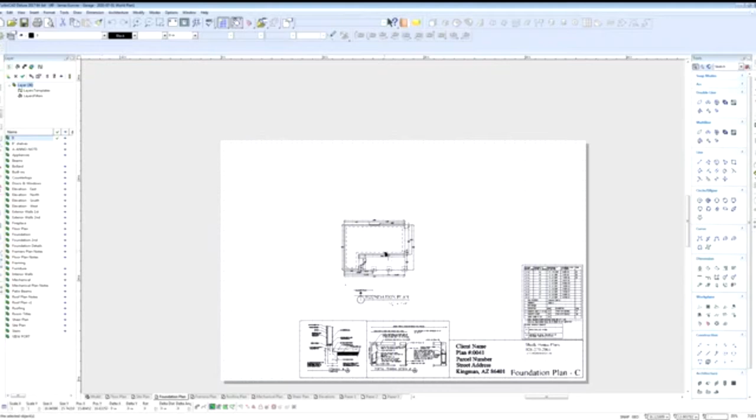Now what I'm going to do here too is make this a bigger scale so it takes up more of the paper. I'm going to right click on this. This is called a viewport right here. This takes an image, like a picture from our model space, and puts it into our paper space. So this is basically a picture of the model. We're going to right click on it and tell it to scale it differently. You can go to viewport and then fixed, and I believe the scale I want is 1 to 24, which I think is half inch equals a foot.

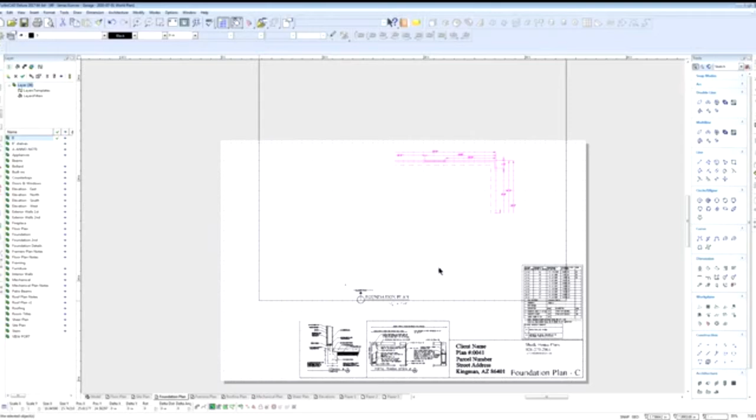All right, so I'm going to put this over there. I'm going to see if I can get this thing big enough. What happened there? Okay, there we go. Center it in here a little bit. Okay, good. So what I'll do then is later come back and change this label. And I got these extra lines in there, I got to figure out what that's about. And I got this in here—what's this? What are these things?

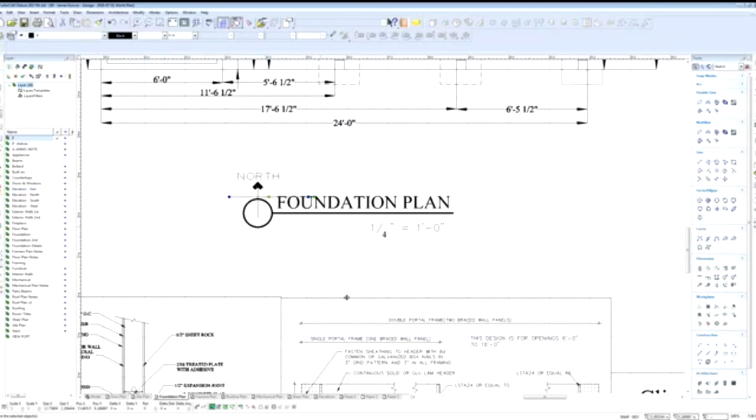It says east elevation. I'm going to get rid of those. Those lines are strangely on the paper space, which is not normal. Normally I just have viewports like this—this is another viewport, and this is another viewport. They're just pictures of the model space, so I can't really edit them inside here. I've got to go back to the model space.

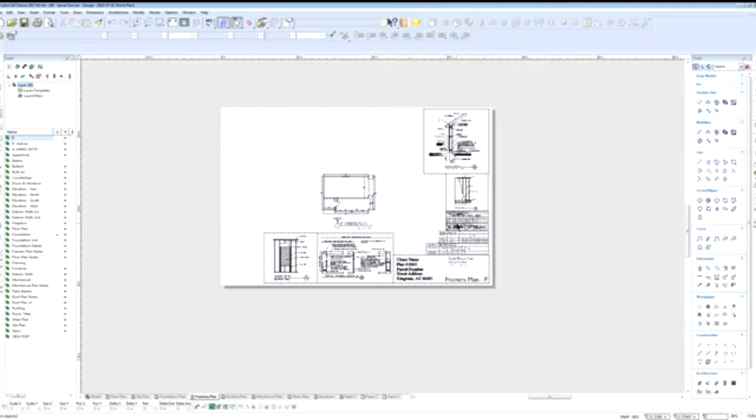All right, so that's what the foundation plan looks like. We're going to go here and change the framing plan. So let's see what it looks like so far. Okay, so these are details from another project, we left them there, and these are notes from a different project that we're going to need to change. Wall schedule is probably fine, but we'll have to adjust that. The beam schedule, we'll have to adjust that too. And then here is the framing schedule.

Notice it shows the beam on there. We're going to do the same thing with this one, make it bigger. Right click on it, go to viewport, go to properties, viewport—and now I actually created myself a little cheat sheet so I can remember the scales, that a half inch equals 1 to 24, but it took me a while, I still don't have it all memorized, so create yourself some notes. Make your life easier.

Slide this up there, make it bigger. There we go. Bring it up a little more. Make it bigger. All right, now we're smoking.

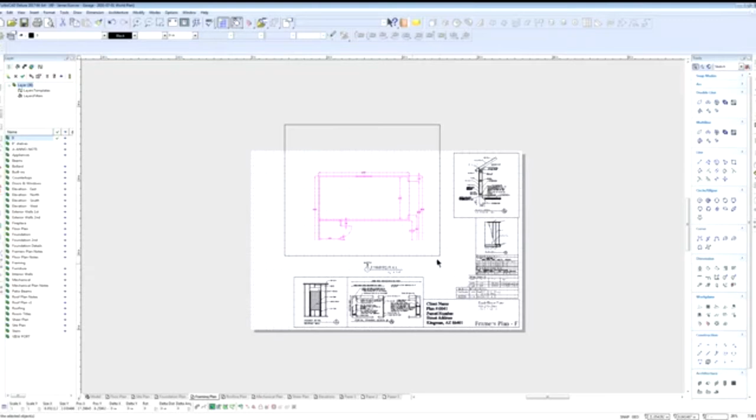Okay, so this is pretty much done. I'm just going to go back and make sure I got all the right dimensions that I need. And I also need to get the concrete back in here, so that's actually part of the viewport—the viewport tells me what layers I see, and right now I'm not seeing that layer. So then if I add the foundation layer, I'm going to get all the dotted lines and stuff, and I don't really want that.

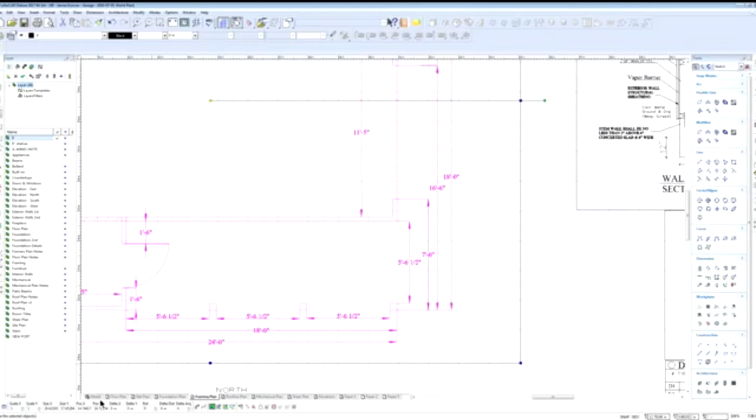So what I'm going to need to do is create some lines here just for the framing plan. I'm probably going to label them exterior walls, on the exterior walls layer, so they show up with the walls. Okay, so let's go back to the model space and do some editing. I want to hide the foundation because I don't want to see any of that stuff. And the foundation second is the second story, so I don't want to see that either. So I'm going to hide those two things.

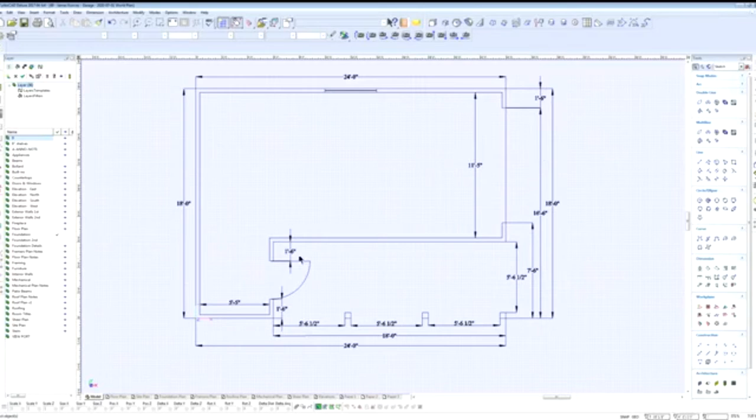Now I'm going to bring up this framing again because that was my measurements that I had before. Now, when it comes to the framing, I want to put in the center of doorways, so I'm going to add some measurements in here to get the centers. And then, like I said, I need to draw in these lines here. So let's grab my line tool. I'm going to make sure I got exterior walls selected, and I'm going to right click on it to make sure it's a solid line, so I could quick drop some lines in here for the edge of this patio.

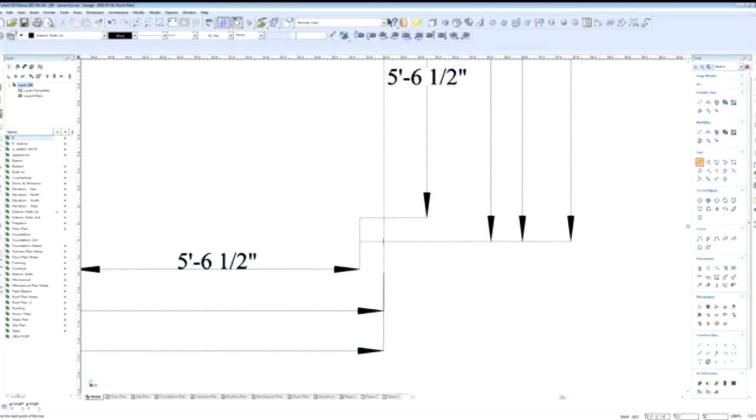Now I'm going to get my dimension tool and make sure I'm in the framing layer instead of the foundation layer. I'm going to come in from the edge to the center of this door, to the wall, to the center here. You use the M key to get to the middle.

Now I've got kind of a problem here. No, that's not really a problem. I'll bring it out here, and then I'll take the 1 foot 6 inch one and bring it in closer, because you don't want these to cross like that. It makes it awkward for the person reading the plans. So there we go.

If the guys need to know where the edges are a little different, they can look at the foundation plan. But these are the framers, so they don't tend to need that information as much. They often want to know where the centers are.

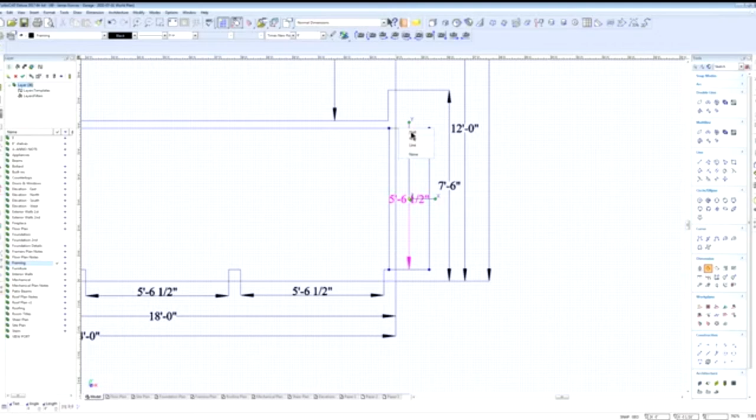Alright, so let's see, I'm going to put in... I think I'll leave this, but I want to add another one. I'm going to bring that in closer, and add the one from the wall to the corner, because I really want them to know that, oh by the way, that's a 6 foot porch. Yep, just like that.

There we go. I'm going to bring this out a little bit, and this out a little bit, to make it look nice and easy to read. That's the whole point. You've got to make it easy for these framing guys, because they don't always have the best sight—they're dealing with dust, sun, and all kinds of stuff out there. We've got to do whatever we can to make things easier for them, and that will also help you get more jobs.

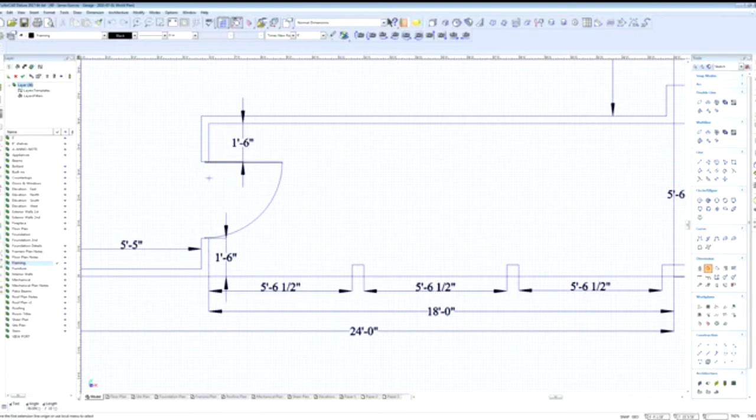Let's see if it'll work for here. M? No, it won't. Okay, so what we need to do is put a line across here to help us, kind of like a guideline, to get this measurement in. Let's go across the middle of there.

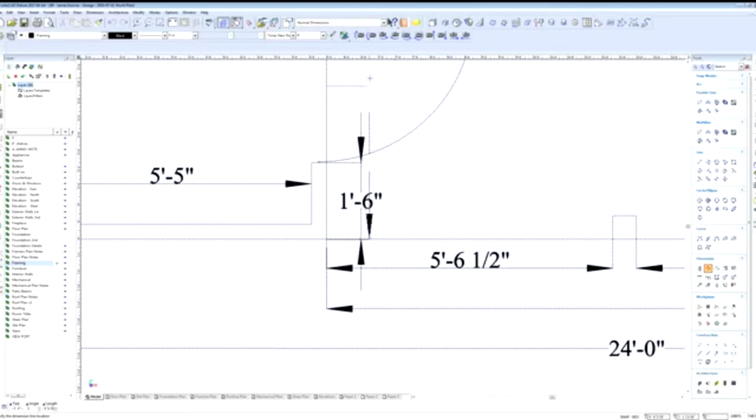Then I'm going to put in my measurement using the vertice button, V, select the wall, come in here, and click M for the middle. There we go. Now I can take my guideline out—zoom out, press space to get my select tool, grab that line and delete it. So now we know the center of the door is 3 feet from the edge.

Alright, let's see, I've got this distance, but I don't have that distance. Let's get that in there. There we go, there we go.

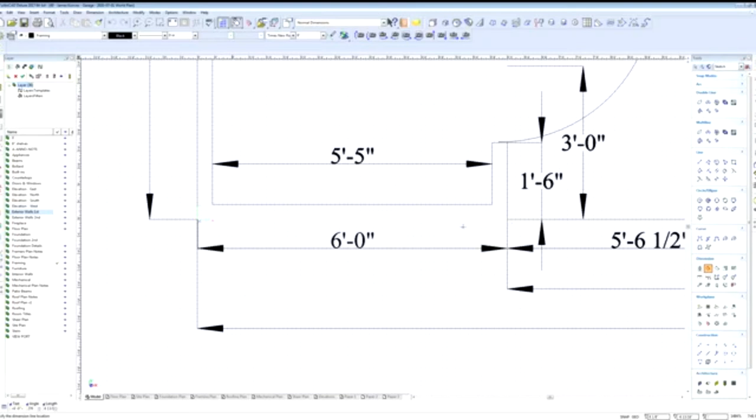Alright, now let's see, zoom out—that distance. Now I need to get to the center of this window, so I'm going to pull this out a little bit and get that going.

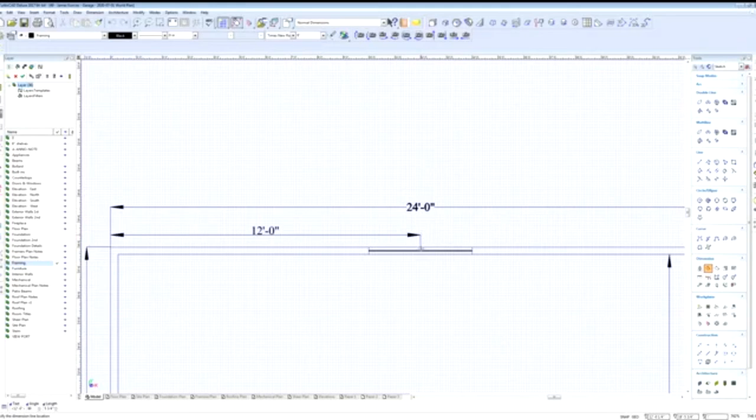Yeah, wall, and then I just use the M key again for the middle. It really does make this a lot faster, these hotkeys. I used to zoom in all the way and try to get as close as I could to these vertices, but I learned I could just press V, and bam, I'm in like Flynn.

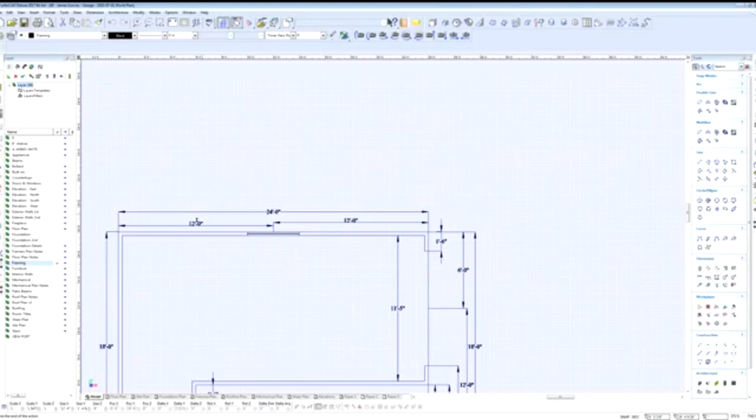Okay, it's coming up. I want to line these two up a little bit, so I'm going to cut the difference here, and bring this one out so they match. Notice you're just matching the tips of the arrows, and the numbers resize themselves to fit where they need to be. It's kind of weird how it stretches out like that, but you just have to ignore that part.

And we're going to take this, I'm going to bring it in where it needs to be. Right there. Okay, great.

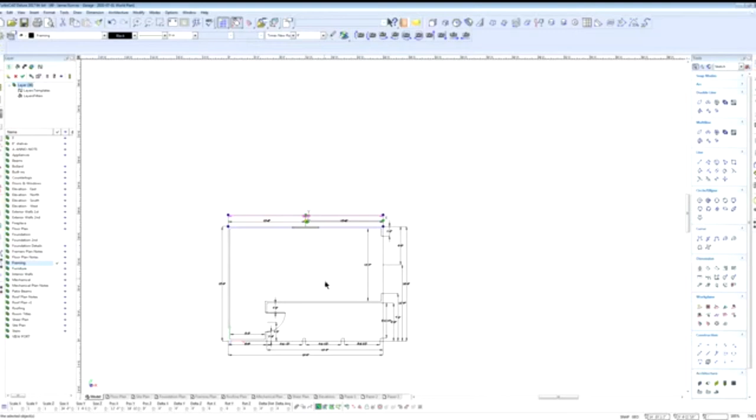Alright, notice how I'm going around the edges to make sure everything's right. I started here, this is right, that's right, this is right, that's right. I'm going to add a couple of measurements in here. I got that corner, 18 feet, but I think I want to put the corners of these two so the framers know where we're at. I'm going to bring this one down to give us some space, and I need to bring the 24-foot one down too.

With TurboCAD, when it does this wait symbol like this, what it's doing is a backup. It's saving it for you, so you just got to be patient, let it save, and then get back to your work. Those come in handy, although it is kind of annoying. But it's a reminder too that you could save it yourself and not rely on the autosave feature.

Let's get the vertice here, the line. I'm going to go from the right side of the pillar to the right side of the pillar, and then I'm going to do the same thing, the right side of this pillar to the right side of this pillar. There we go. And I'm going to bring this in closer.

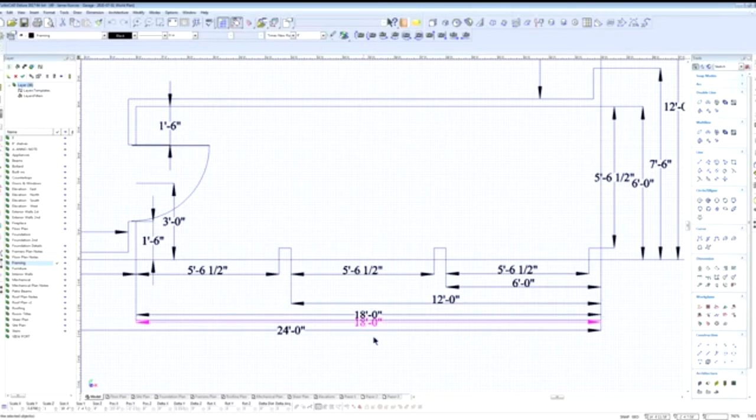That's nice little 6-foot increments, right? 6, 12, 18, 24. That's nice. It'll look good, well balanced. It'll be good. Alright, so I think I'm good with the framing plan.

This particular garage was real simple. I mean, you can get more involved when you're dealing with closets and bathrooms and all kinds of stuff. I think that anybody framing this would be able to figure out where everything goes based off of that. Now, I could bring this up a little bit.

Like this. Now notice how I clicked on the line. That means I can only go up and down. If I clicked on this line, I can go right and left. If I clicked on the yellow part, I can move wherever I wanted.

Because you got the 6-foot on this side, if they wanted to know this distance, they could check it, 5'5". That's a good check. This thing here, I'm going to do the same, bring it out to the middle a little bit.

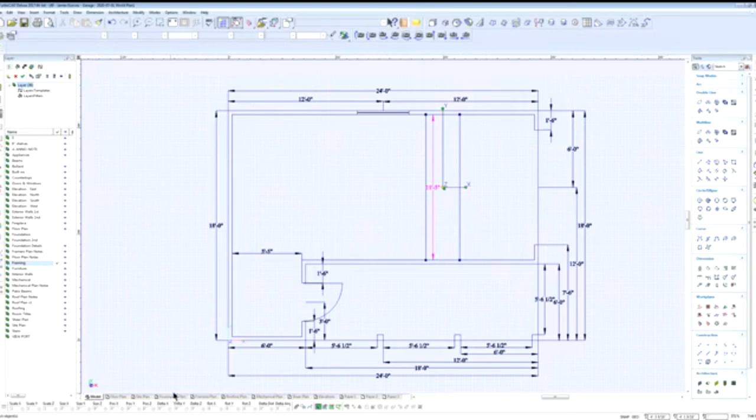There we go. I think that... let's see, did the foundation plan show the garage door size? No, it didn't. I think I'm going to put that in for both of them, on both plans. So I'm going to put that on the framing size of that door.

Start here, the V, and the line's fine. And the V here, and the line's fine. Come out, I'm going to match it up with that 1'6".

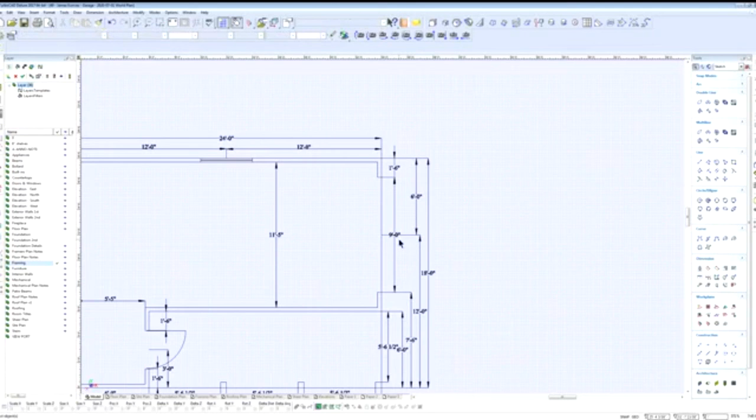Now I'm going to copy this thing right here with the copy tool. In order to copy it, I got to move it slightly. So I'm just going to grab it and drag it to the right just a hair, just enough so I can see the pink show up, and I'm going to click again. And so now I have two of them, right on top of each other.

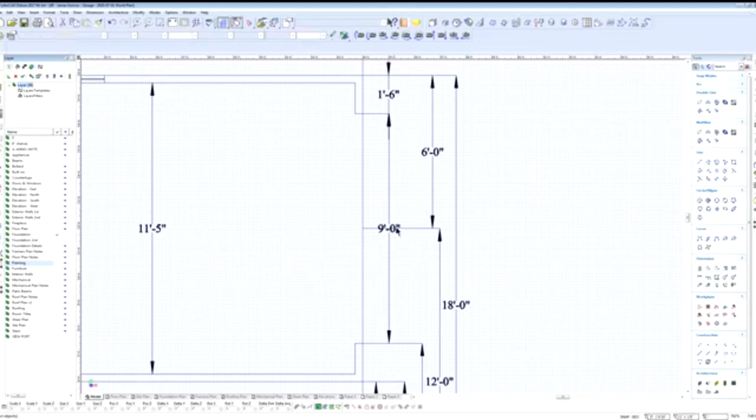This second one I'm going to move. I'm going to move it to the foundation plan. I'm going to click on that, and since it's selected, it'll move it over there. So now if I unselect the framing plan and select the foundation plan, you can see it show up there.

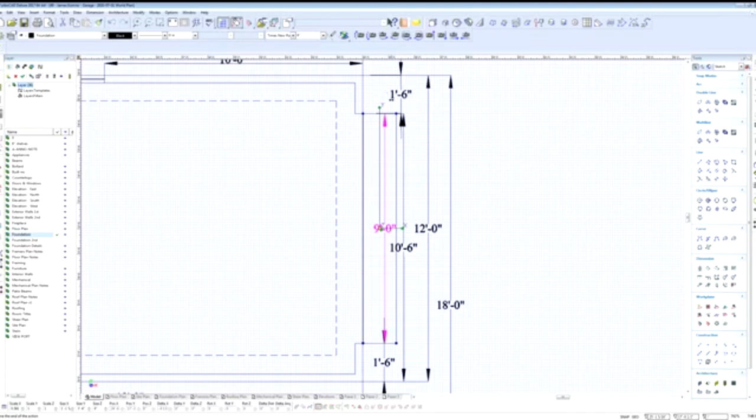Now I do want to modify these a little bit to make sure they're not sitting on top of each other. Bring this one down. Bring this one down. There we go. Line them up. Boom, boom, boom. There we go.

That's nice. Alright, so let's take a look. Here's the framing plan. This is pretty much what the client's going to get right here. Looks pretty close. Now notice I was able to reuse an old detail from a different plan. I'll probably get to reuse this detail for this plan too. I'll need to go back to the code and make sure all these little numbers and stuff are right.

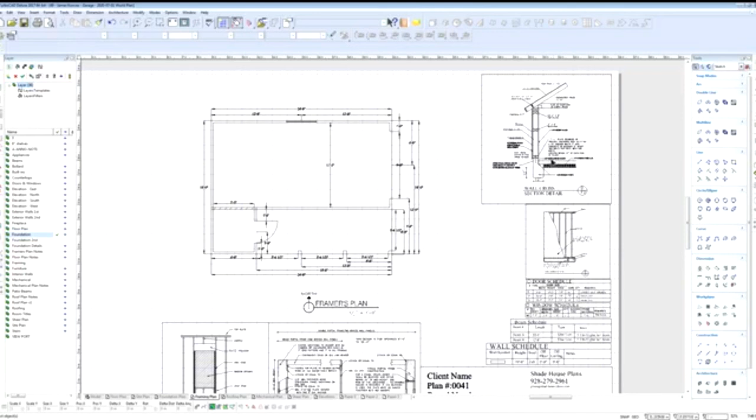Here's the shear plan. That's for later, but this is an example of how it's done. And again, this is correct, it's the stem wall and all that. So I just need to do a couple modifications, and this one's ready for the client.